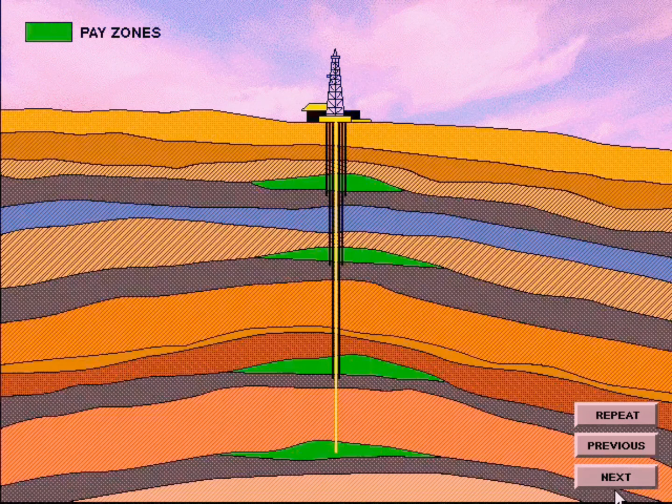There may be several strings of pipe in any given well. The number of the strings is determined by the number of zones being drilled through. These can include freshwater, saltwater, and potential production zones. Depicted here are 4 production or pay zones. Each zone would be cased off or isolated until it is to be produced.

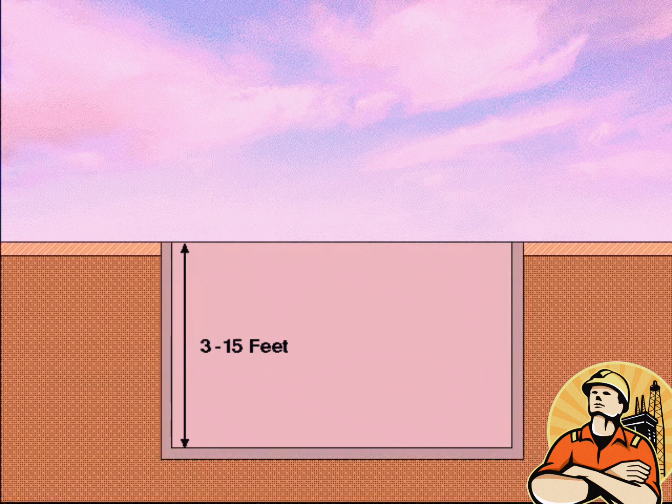On land, a majority of wells begin with digging a cellar, which can be from 3 to 15 feet in depth. The primary purpose of a cellar is to align the Christmas tree at relative ground level. Having the Christmas tree at relative ground level allows for easier access to the valves, chokes, and other equipment.

The first string of pipe to be used in a well is called the conductor pipe, or drive pipe. To begin, a large diameter hole is drilled to a specified depth, generally relatively shallow, such as 100 or 200 feet. The pipe is driven into the ground to a specified depth or to the point of refusal. In most cases, an adapter flange or drilling flange is welded to the conductor pipe as a means to connect a diverter system or blowout preventer system.

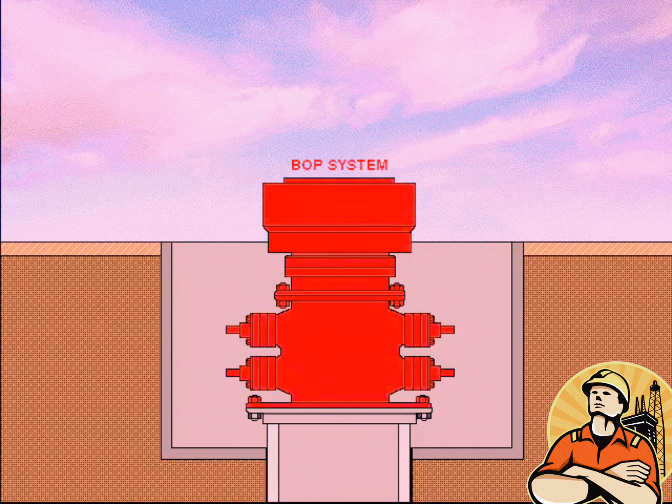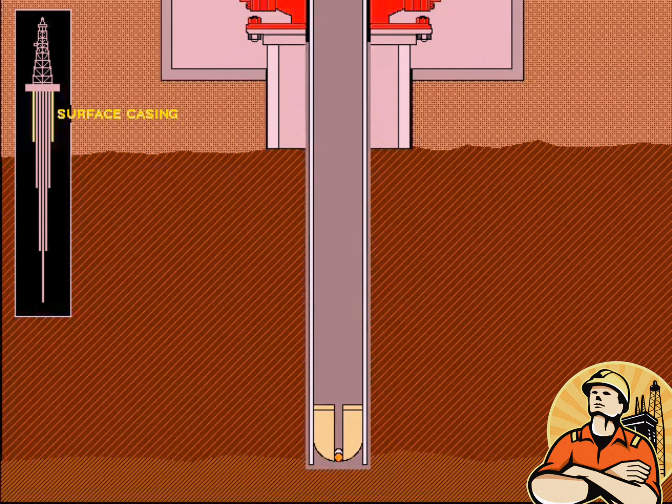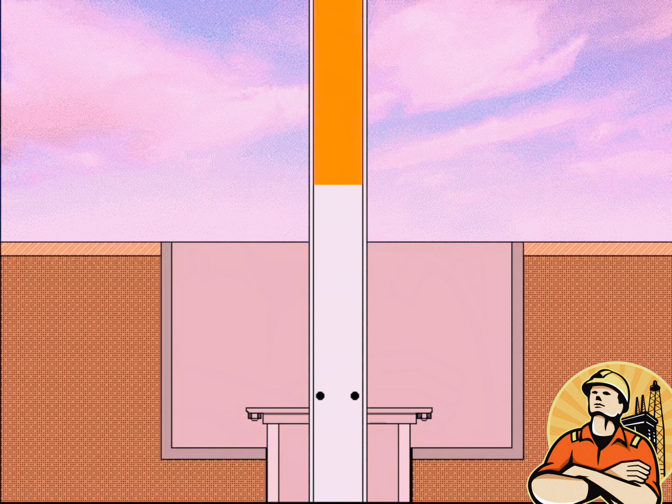Upon completion of the surface hole, the surface pipe is run to a specified depth to isolate any freshwater, saltwater, oil, or gas zones within that depth range. The surface pipe is run and cemented in place back to the surface. A cement plug is left in the surface pipe so that the diverter system, or BOP system, may be disconnected or nippled down safely. After the diverter or BOP system has been nippled down, the surface pipe is drained. Then the adapter flange or drilling flange is cut off.

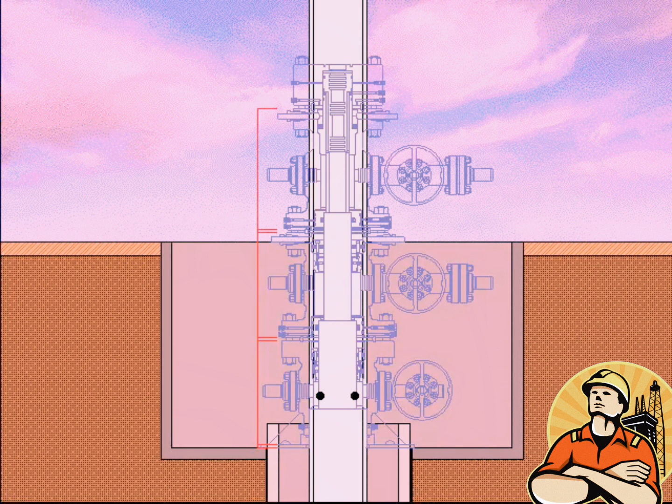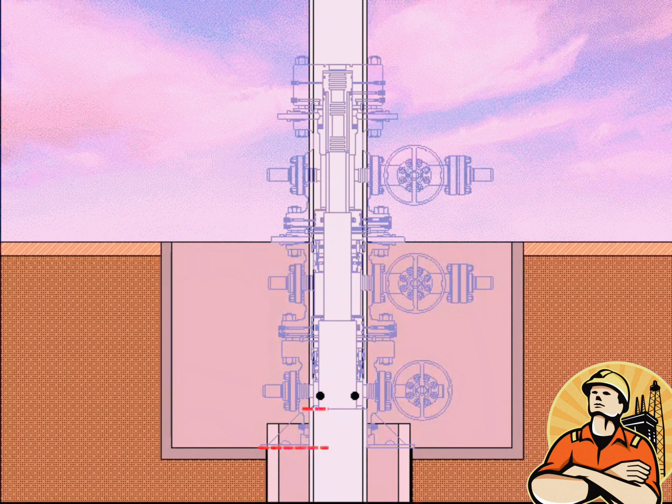The final cutoff height is determined by adding the height of each piece of wellhead equipment plus the standoff distance between each piece of equipment and the ring gasket height. Then deduct the depth of the slip-on socket in the bottom of the casing head housing. If a base plate is used, its height must also be considered. The sum of these heights is then deducted from the cellar depth to determine the final cutoff height for both the conductor pipe and surface casing.

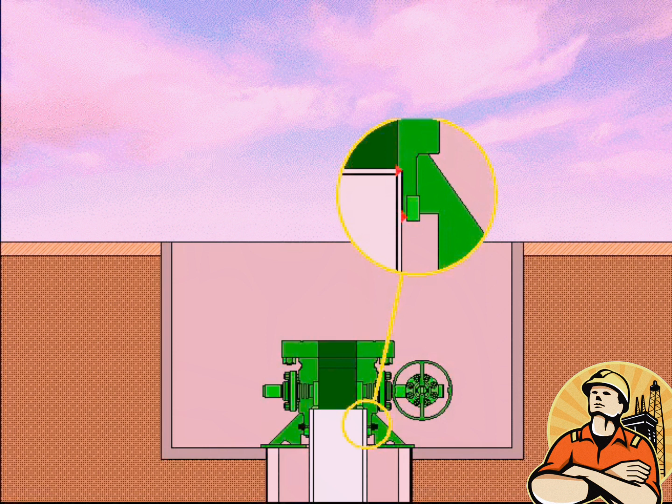When the final cut on the conductor and surface pipe is completed, the casing head housing is prepared for installation. The casing head housing is welded in place on the surface casing. The piece is welded on the inside diameter and the outside diameter, then tested to assure there are no leak paths in the welds. This test checks the welds but does not test the integrity of the casing head housing.

The base plate, which is slightly larger than the conductor pipe, may be tack welded to the conductor pipe if desired. The base plate serves as a means to transfer weight from the casing head housing back onto the conductor pipe. When the casing head housing has been successfully welded and tested, the BOP system is installed or nippled up, and preparations are made to drill out for the intermediate string of casing.

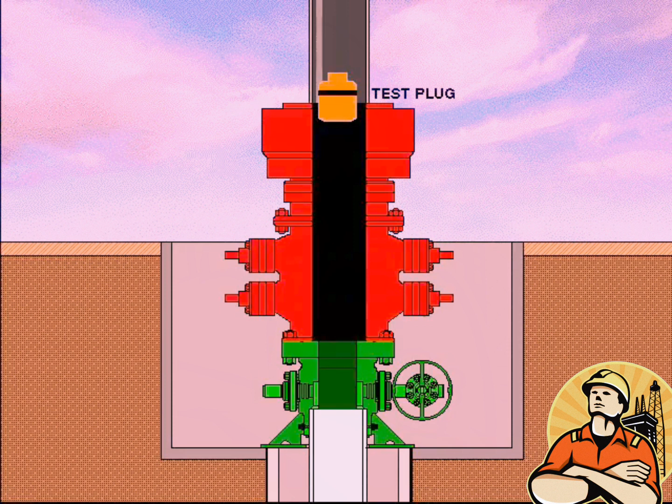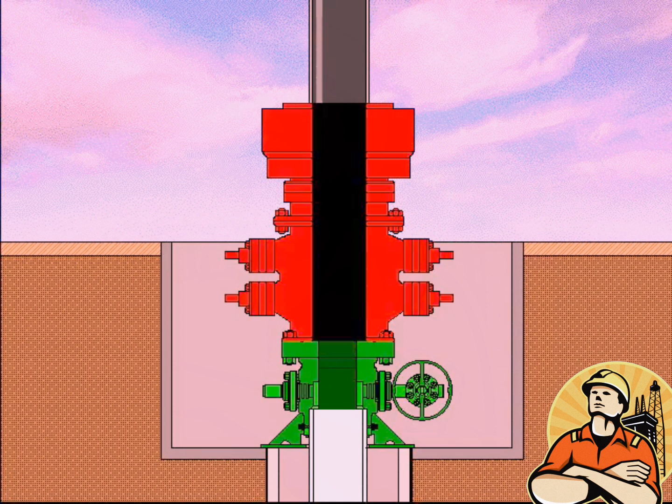To test the BOP system, the test plug is made up on the drilling string and lowered through the BOP system until properly located in the casing head bowl. Pressure is applied from above the plug and the BOP system is tested. Upon completion of the BOP tests, the wear bushing running tool is made up on the drill string and the wear bushing installed on the running tool.

The wear bushing is then lowered through the BOP system until located in the casing head bowl. The wear bushing is locked in place either by lockdown pins in the casing head housing flange or by lockdown pins located in a lockdown flange. The running tool is then removed and the drilling operation can resume.

After the hole has been drilled for the intermediate string, the casing is run in the hole and cemented in place. The intermediate string is cemented to a predetermined depth to ensure a good cement bond is obtained between the surface casing and the intermediate casing. A cement plug is left in the intermediate casing just as it was in the surface casing.

The casing is then suspended from the elevators at the rig floor, and the casing hanger is installed either through the BOP system or underneath the BOP system. In this example, the casing hanger will be installed underneath the BOP system. To begin, the BOP system is nippled down and picked up to a height of approximately 3 feet. The casing hanger is then installed.

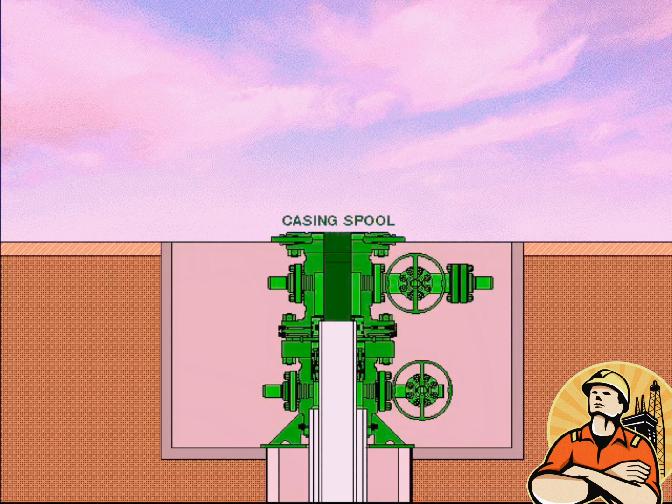Holes are cut in the casing to allow the drilling fluids to drain out of the casing riser. When the casing has drained, a rough cut is made and the balance of the casing riser is removed. The BOP system is removed. The casing spool with a crossover seal is installed. The BOP system is nippled up and preparation is made to drill out for the production casing string.

To test the BOP system, the test plug is made up on the drill string and lowered through the BOP system until properly located in the casing spool bowl. Pressure is applied from above the plug and the BOP system is tested.

Upon completion of the BOP tests, the wear bushing running tool is made up on the drill string and the wear bushing installed on the running tool. The wear bushing is then lowered through the BOP system until located in the casing spool bowl. The wear bushing is locked in place either by lockdown pins in the casing spool flange or by lockdown pins located in a lockdown flange. The running tool is then removed and the drilling operation can resume.

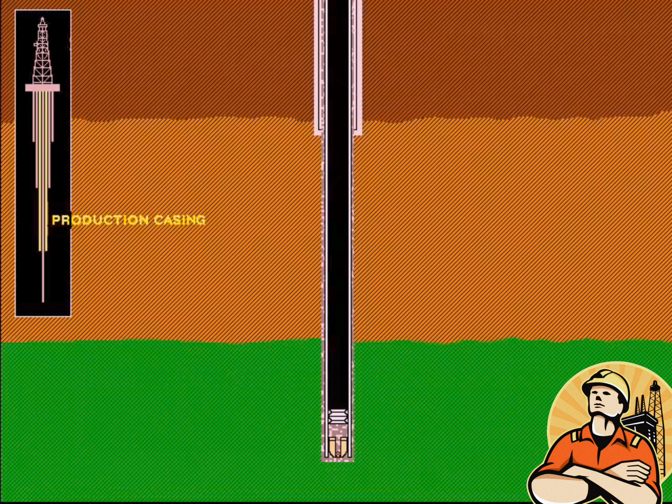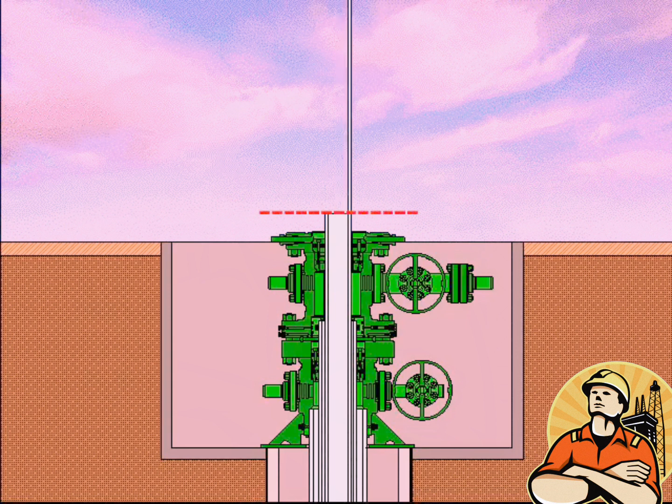The production casing string is generally run to the total depth of the well and is the casing string in which the production packer is installed. When the hole is drilled and the production casing is run and cemented in place, the casing hanger is installed. The casing riser is drained, a rough cut is made, and the BOP system removed. The final cut is made to the production casing in preparation for installation of the tubing spool.

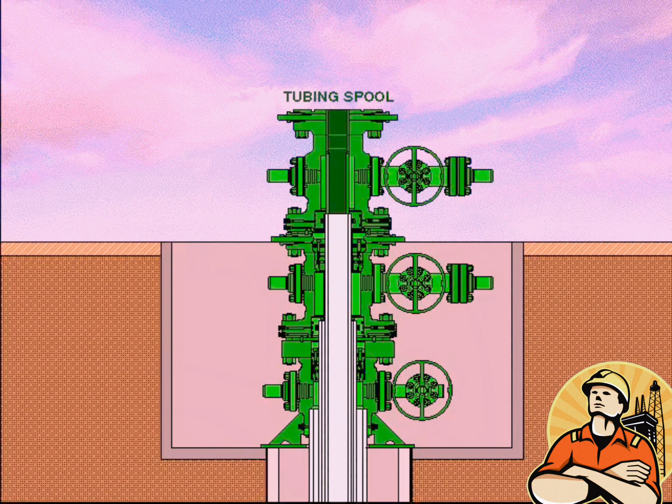The tubing spool with a crossover seal is installed in the same manner as the casing spool. After the tubing spool has been installed, the seals and connection are tested, and the BOP system is nippled up. Preparations are now made to run production tubing in the hole. Production tubing is considered any pipe string 4 inches in diameter or less, though sometimes larger sizes of pipe are used.

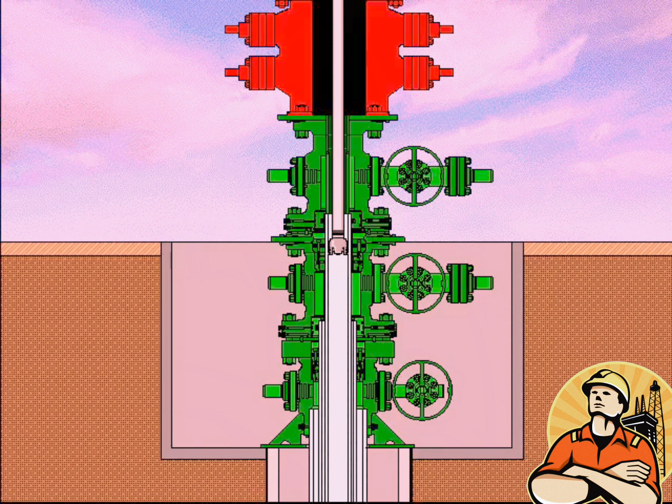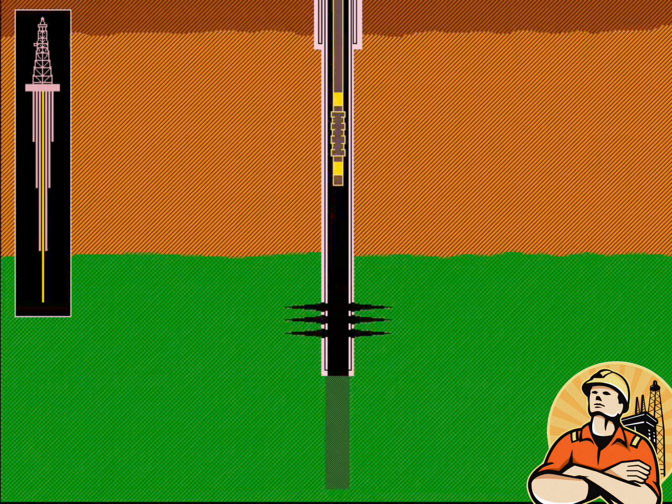When the plug has been drilled out and a cleanup trip completed, the perforating gun is run in the hole and the casing is perforated, or shot. The downhole packer assembly is run and installed in the production casing. A packer is in essence a seal assembly that isolates the reservoir from all strings of pipe except the production tubing. The production tubing is run with a bottom hole assembly to seal inside the packer.

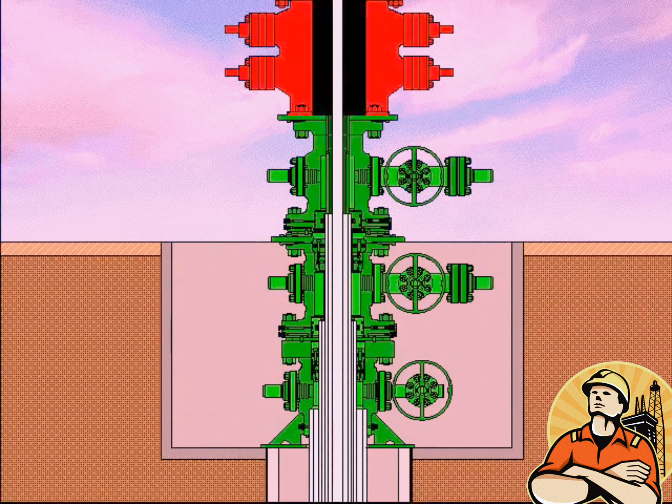After the tubing is spaced out and proper weight set on the packer, the tubing hanger is installed at the tubing on the rig floor, then lowered into the bowl of the tubing spool. The BOP system is nippled down and preparations are made to install the production Christmas tree.

The production Christmas tree is made up of a seal flange, which is often called a tubing head adapter, a series of gate valves, a T or cross, wing valves or side valves, and a choke. The Christmas tree is the group of equipment that controls the flow of the well. Each Christmas tree has one or more surface safety valves that will shut down the well in an emergency and prevent damage to the equipment downstream.

To install the Christmas tree, determine the direction the Christmas tree should be installed, pick it up, level it, and lower it over the extended neck of the mandrel tubing hanger. The Christmas tree is nippled up to the tubing spool and the connections and seals are tested. The well is now ready for production testing.